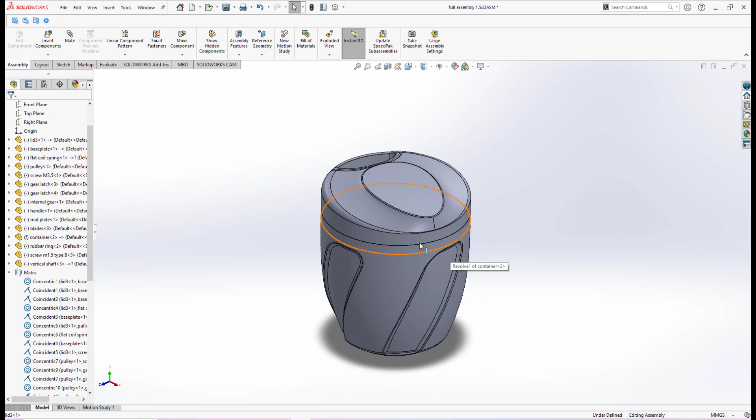But the first thing I need to check, in order for us to do full assembly, is to make sure that all your parts are in a correct position. So one thing that I noticed is that if I go to the top view, the direction of my lid and also the handle is kind of slanting to a certain angle.

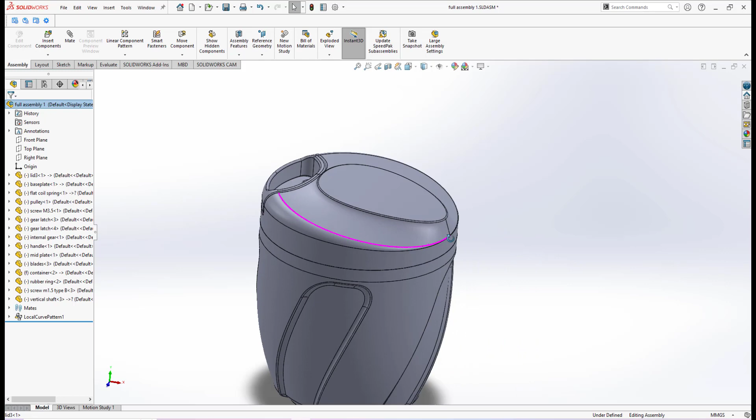So let me go back to isometric mode. I need to make sure that this lid and also the handle, since the handle will follow the lid because I have already set the mate setting, the only thing that I need to change is the lid itself must be perfectly horizontal. So if I go to top view again, the orientation of the lid is not in a horizontal orientation.

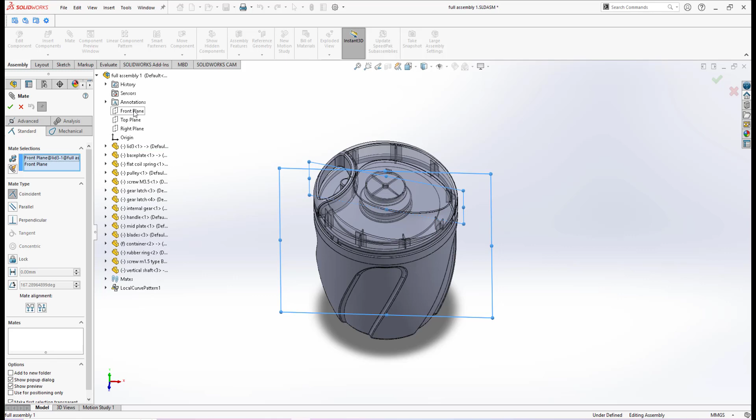So in order to do that, I need to add another mate setting for the lid. If I click here under assembly, we have mate. I must make sure that for the mate setting, I select the lid front plane, which will mate with the main front plane of this assembly file. Then if you look here, our lid and also the handle will follow, and if I go to top view, it is perfectly horizontal.

Okay, now I save my assembly file.

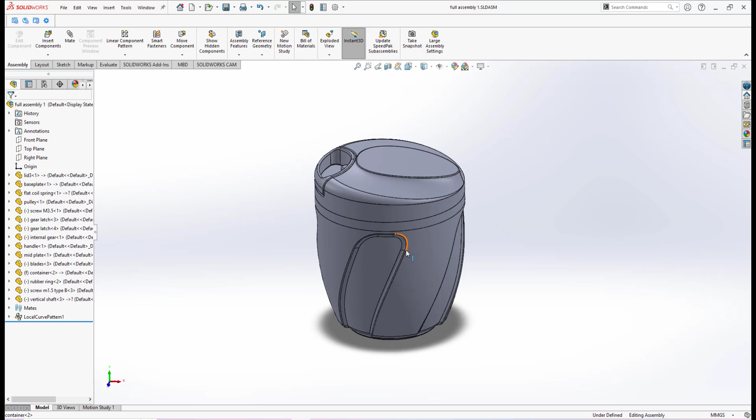Another thing to do in assembly, before we create the assembly drawing, is we must make sure of the order of our assembly. If you look here, I already did the assembly, but the order of my components is not in proper order. Before we do the assembly drawing, we must make sure that all the components involved in this mini blender are in order. What I mean is, let's say when you dismantle this mini blender, you disassemble it, and you want to assemble it again, the order of your parts must be based on the proper order.

So it means that what will be our base? For example, if you want to assemble back this mini blender, our main component or base component should be... sorry, my mistake, our main component will be the container. So the container will be the base of this full assembly.

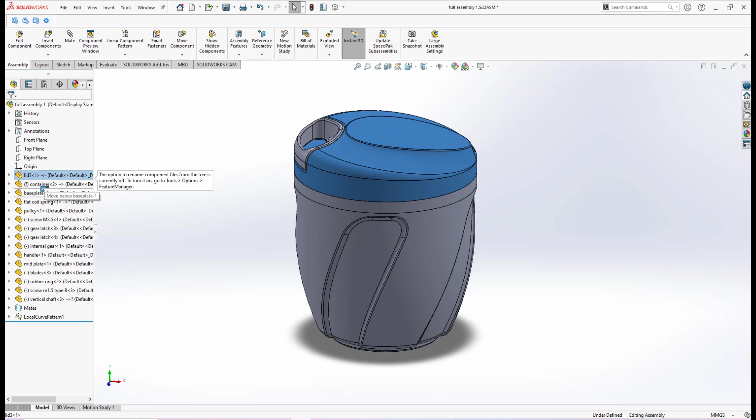So it means that this container, where is my container? Container is here. I can drag this container up until it becomes the first in my list. Let's go back, sometimes you cannot drag to the top like this. The lid here, I make it lower, so container will be number one, the base component.

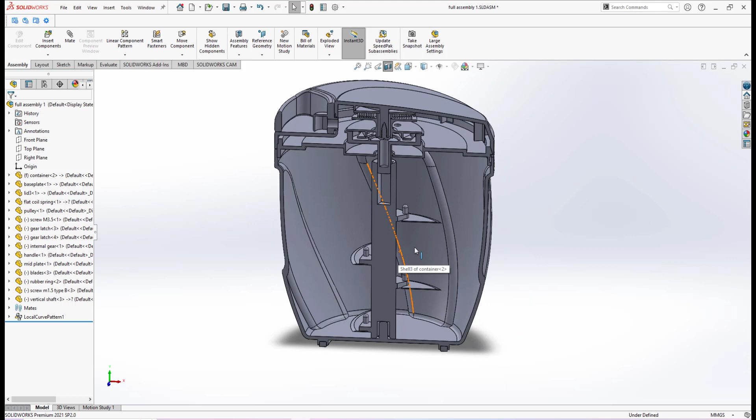When we want to assemble back this mini blender, after we have the container as the base, what's next? Let me go to a section of this front view to better explain the orientation of this assembly. When we want to assemble this mini blender, the first thing will be the base.

So the second component will be the shaft. Then we will mount the shaft. Then we will mount the blades and the screw to the shaft. So the vertical shaft, we should drag it so it becomes the second component right after the container.

Then after the shaft, we will mount the blades and the screw to the shaft. So the third component will be the blade. I select the blade and drag it up until it becomes the third component. Then we have the screw, the small screw here, and the screw M1.5 here will be number 4 right after the blades.

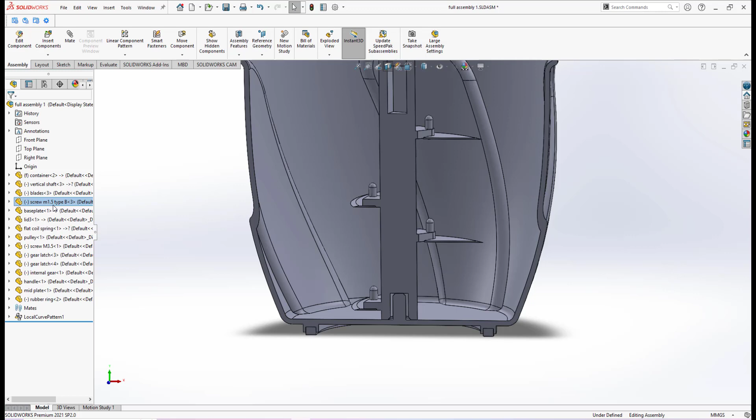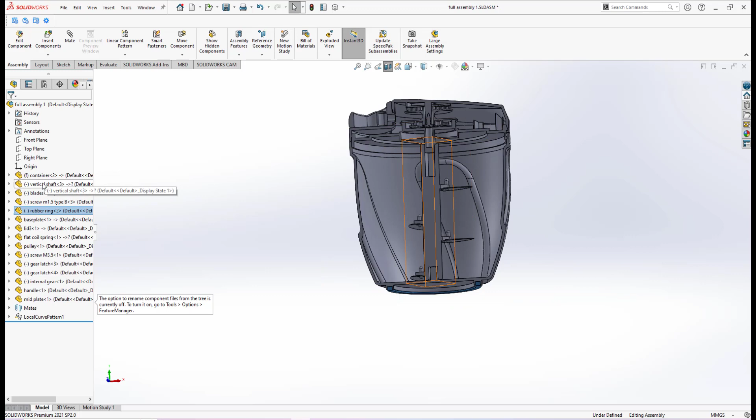Okay, then this shaft will be mounted on this main component, the container. Then we will mount the rubber ring, so the rubber ring should be right after the screw. If you look here, the order is proper: first is the container as our base, then the vertical shaft, the blades, the screw, and the rubber ring at the bottom. This will be the sub-assembly of our bottom components.

Then we go to the sub-assembly of the top component. After we have assembled the bottom parts, then we will assemble the top parts, the sub-assembly of the top parts. So for the sub-assembly of the top part, the base will be the lid.

So the lid here should be dragged right to the bottom of the rubber ring. As if you remember my previous video where I do the assembly of this component, after the lid, then I will mount the base plate. So the base plate is right after the lid. Then after the base plate, we have the coil spring.

So the coil spring, if you look here, is in order right after the base plate. Then after the coil spring, we have the pulley. Then after the pulley, we have the screw. Now I have the screw, so it means it's in order.

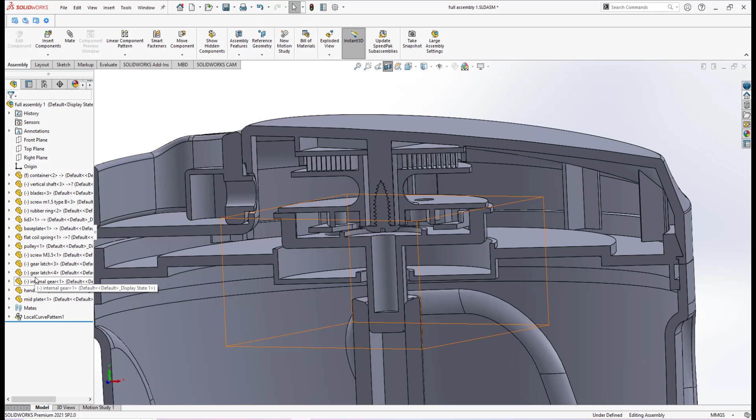Then I have gear latch, so I mount the gear latch, because we have two of them, gear latch 3 and 4. And then I will mount the internal gear. So it is in order.

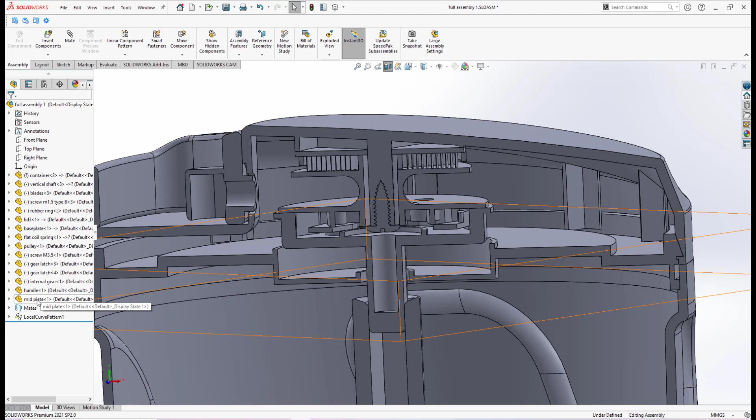Then after the internal gear, we have the handle. We assemble the handle, and then the middle plate is the last of our sub-assembly of the top parts. Then we will mount all this assembly on the top parts to this sub-assembly of the bottom part, so it means now my components are in order.

So it's better to do it like this. Make sure that the order of your components must be ordered. That's why when you do assembly drawing, let me save this. Okay, I save it again, and now I will do the assembly drawing.

So to create the assembly drawing, I will click at new document here. We have an arrow here, so I will go for make drawing from part assembly.

SolidWorks will ask for the standard sheet size. What is our drawing size? A1, A2, they have all of them here in the library. But in this case, I already have my template for the drawing sheet done in A3 size. I will browse my template that I've done. Hold on, so this is my template. I click OK. This drawing sheet is in A3 size.

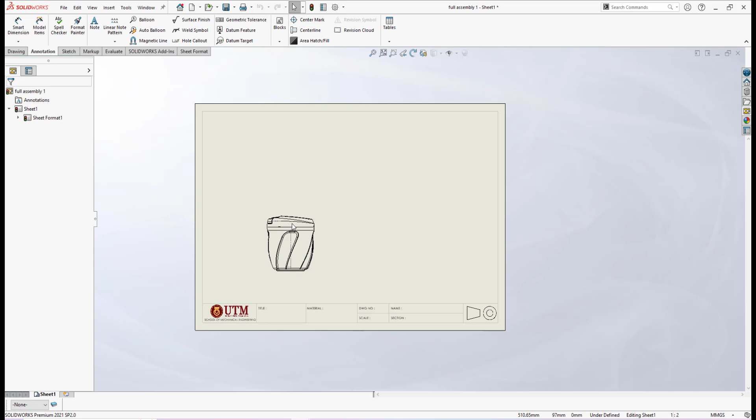Not necessarily for all products must you drag top, front, and side view, because for a product like a mini blender, the best views to drag are top view and front view. Also automatically, if you look, SolidWorks will detect the top view. And if I bring it to the corner, we go for isometric view. Okay, let me cancel it, just press escape and we cancel it. This isometric view I can drag it somewhere at the corner here.

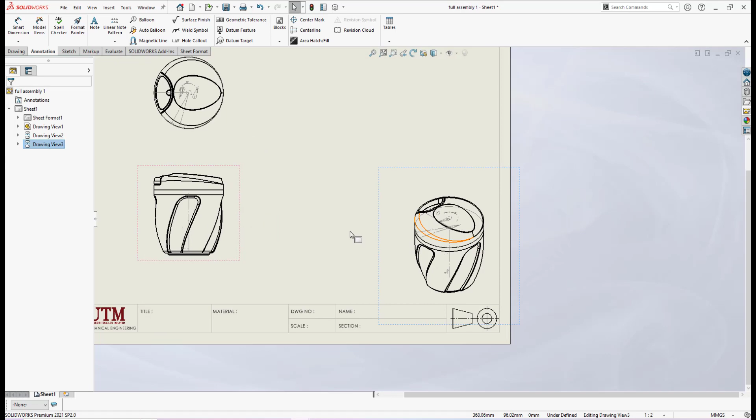One thing to do here, if you look at all the views of our drawing, they show a sketch, so we can go under view, under hide/show, and turn off the sketch so we have a clean view. Another thing to do, if you look, this is a top view, this is a front view.

If you look at this front view, I click at the viewport. If you look at the menu setting on the left here, under the scale, if I go for custom scale, the default is 1:2. Under custom scale, let's go for full scale 1:1. But if I click at 1:1, if you look on the screen, it's kind of too big, so I think it will not fit into this A3 size paper.

So I will go back to 1:2. It is reduced. I think 1:2 is good enough to fit into this A3 paper size.

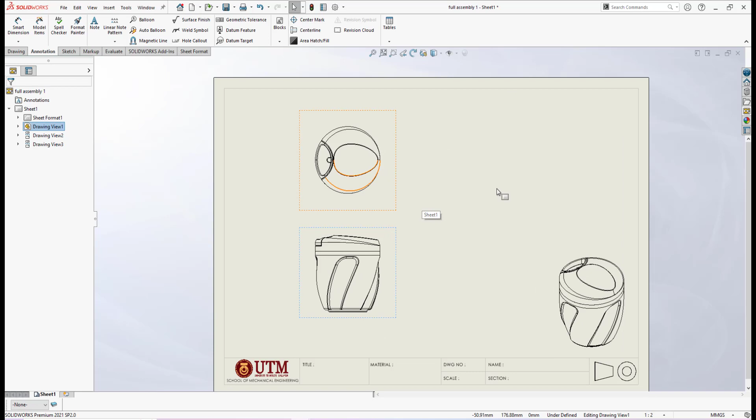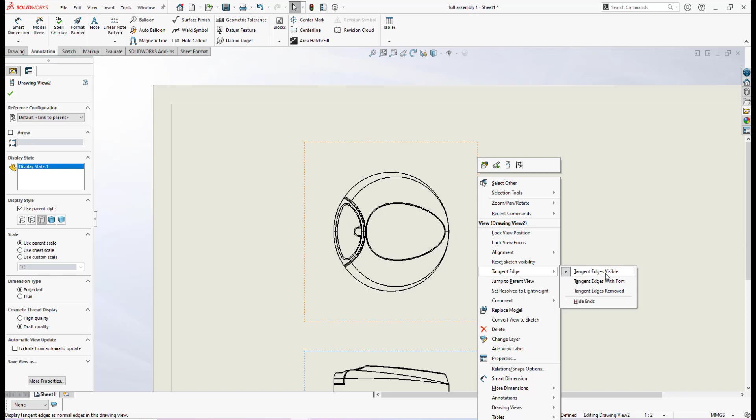If I zoom in on the top view, it shows all the edges. For proper engineering drawing, these tangential edges should not be shown. To remove that, I go to this viewport, click on it, right click, and go under tangent edge. By default tangent edge is visible, so I set tangent edge to remove, and now we have a nice proper outline for our top view.

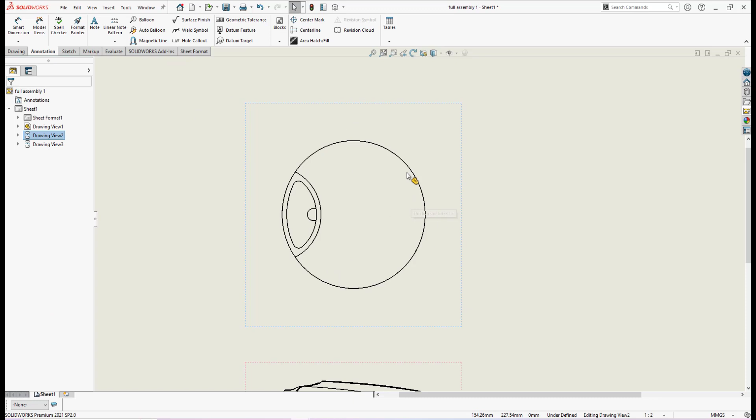If you see in this top view, we have a full circle of our product, so better we create a center line. Let me click OK first. In Solidworks, under the annotation tab, we have a center mark. I create a center mark and simply touch the circle line, and automatically Solidworks will make a center line.

This product is a mini blender, so most of our components like the shaft, blade screw, internal gear, pulley, blade plate and so on are inside the component, so they're not showing in this front view. For this assembly drawing, we should do a section.

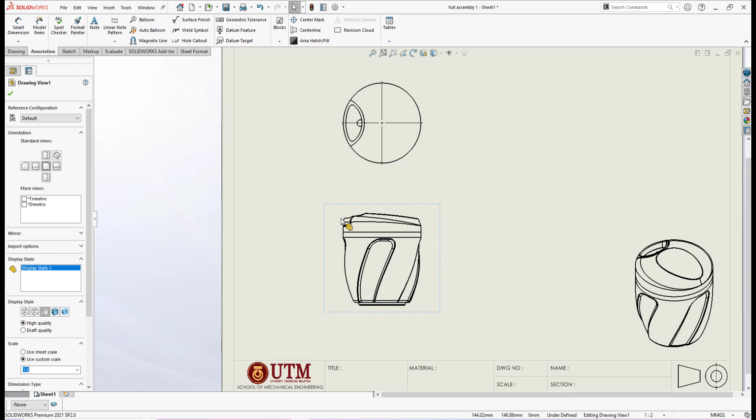Normally in assembly drawing we have a full section. So what I will do is replace this front view with a section view. I select this front view and delete it, click yes.

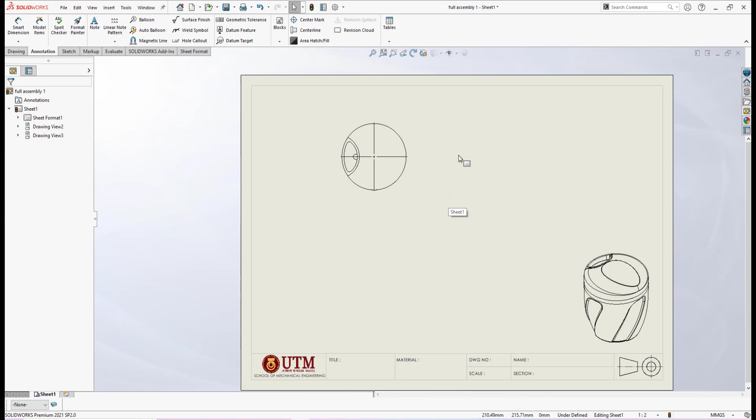This top view will be my cutting plane, and I will do a full section, with the section view appearing at the bottom from this cutting plane at the top view. In Solidworks, under the drawing tab, we have section view. I click at section view, and if you look at the menu on the left, we have vertical, horizontal, auxiliary and aligned options.

In my case I will do the horizontal, I click the second one, then bring it to the center of this and click OK. Then this menu will appear, where we can select any component involved with our cutting line.

For example, standard components like a screw, spring, ball bearings or a plain shaft need not be hashed when we do a section. So I can select certain components which should not be included in the section line. In this case, I simply click OK because I will do that later.

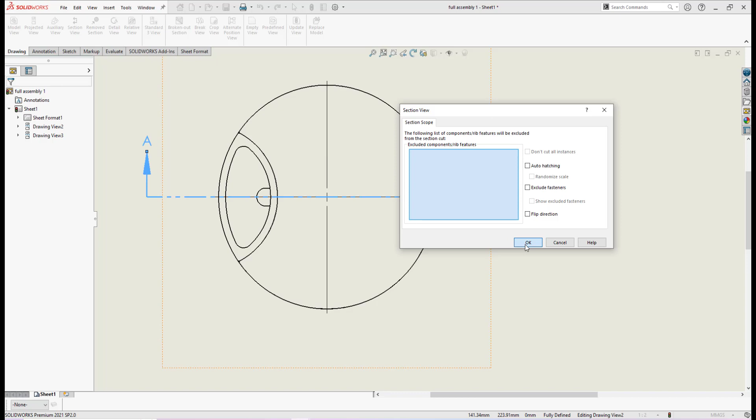I'll show you. Now we have a section view, I drag it to the front view. This is our front view, and it also says Section AA, with our cutting plane labeled AA. If I click OK...

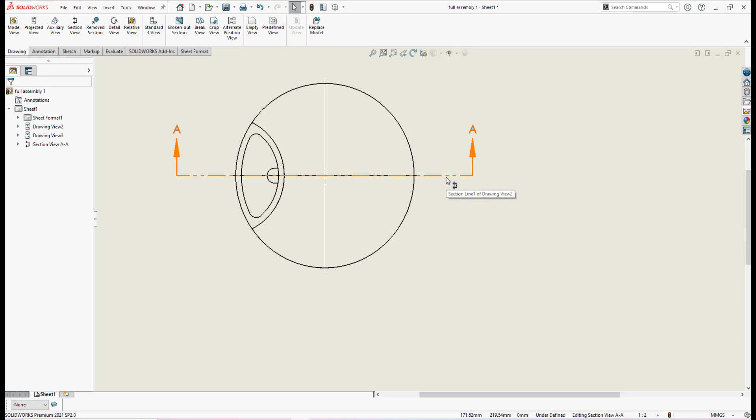But if you look, this cutting plane style isn't the standard we want, because since we use ISO, this is currently American standard. To change this, I go under Options, under System Options, then the Document Properties tab, I go to Views, and under Section here we see by default Solidworks uses ANSI, American National Standard Institution. For our course we will use ISO.

So I will select ISO, then use the first option, meaning the standard with connector, so we have a center line and arrowhead. Then I click OK. If you look on the screen, it's changed into the standard ISO style for the cutting line of our section.

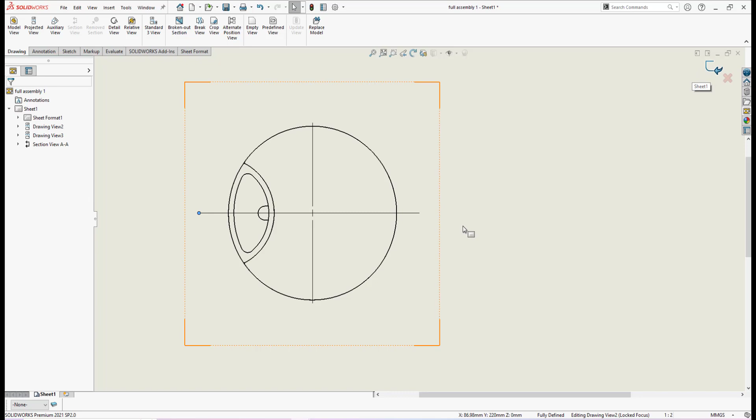Another thing to check: the section line is kind of too long. I can adjust the length by clicking on it and going to edit sketch. I select this line and edit it to make it shorter, and also select this other line and make it a little bit shorter. Then I exit the sketch, and now my cutting line is shorter.

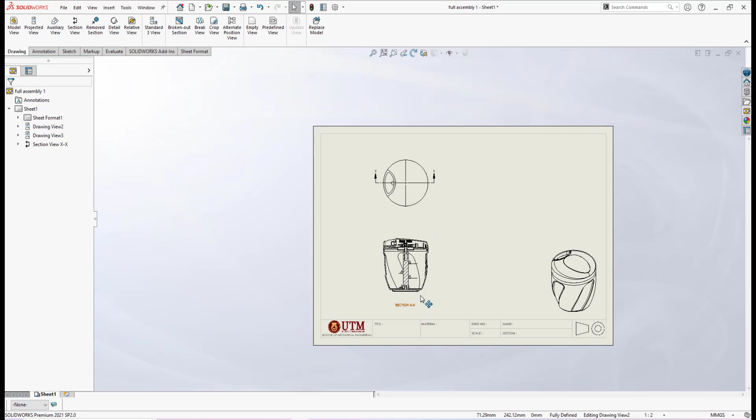The next thing to do: the cutting line labeling here is AA. I can change this labeling to X, making sure we use the capital letter, and now it changed to XX. If you look, the labeling here is Section XX, so let me drag this a little bit lower.

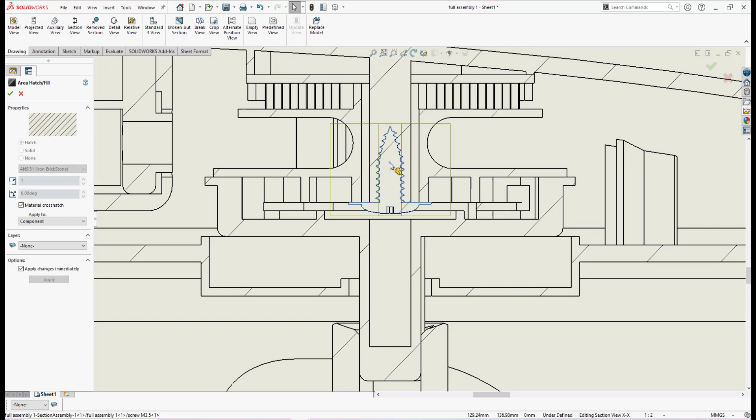If we look in the section view, Solidworks automatically does hatching for all components, including standard components like screws. In standard engineering drawing for assembly drawings, standard fasteners like screws, bearings, and springs, if a cutting plane passes through them, should not be hatched in the section view. So I need to exclude the screw by right-clicking it, going to properties, then under section scope, select the component we need to exclude from the hatch.

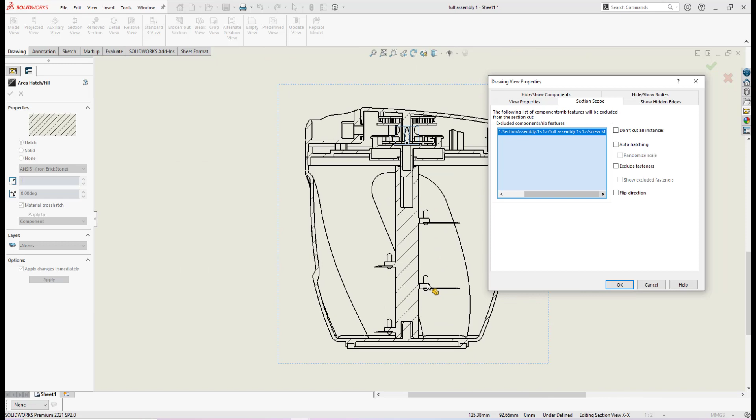I select the screw, so it's listed here. Now I need to check what other standard components are really in the section cut. This shaft, for a standard shaft engineering drawing, also need not be hatched, but for this case, this mini blender shaft is a custom-made shaft, so I let it be hatched in the section view. So the only thing I select is this screw. If I click OK, now the screw will not be hatched.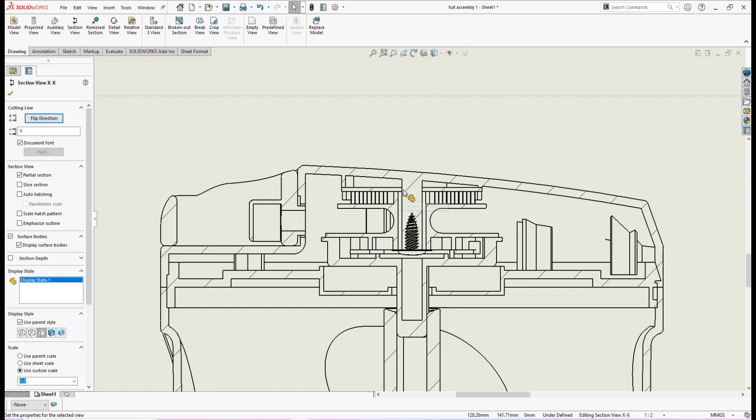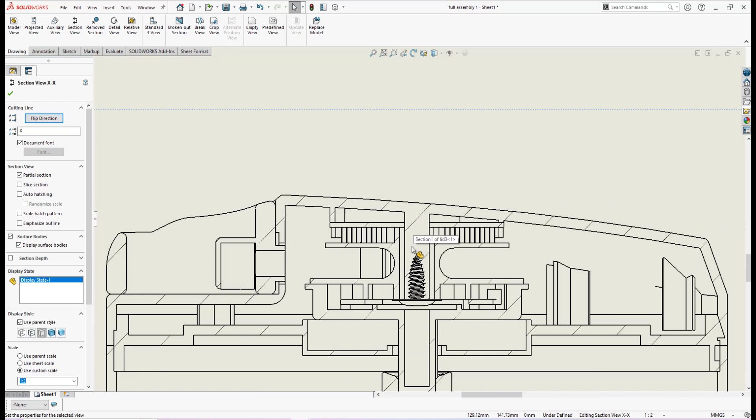Next, since Solidworks does this automatically, it will hatch all the other components. If you look, this is the hatching line for the lid, and this is the hatching line for the handle, the pulley, the internal gear, and so on. In standard engineering drawing, for different components we need to put the hatching line at different angles, and also the distance between the hatching lines is too far, so I need to reduce the scale.

To do that, I select the hatching line of this lid. In this menu, Solidworks uses material crosshatch by default, so I uncheck the material crosshatch and use the most basic pattern, which is parallel lines. Under parallel lines, the first setting is the distance of the hatching line. If I increase it to 3 instead of 1, Solidworks makes the hatching lines narrower, so it becomes more dense. I go for 3, and the angle I go for 45 degrees for this lid.

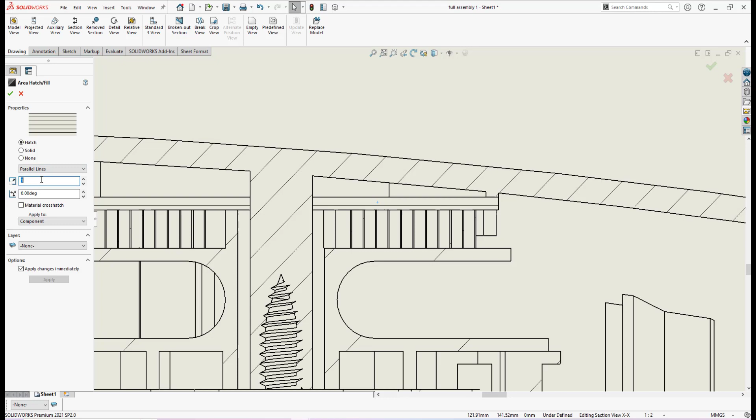Then for the other component next to this lid, for example the base plate, I select the base plate and do the same thing: uncheck material crosshatch and use parallel lines. For this one, the scale I put is 3, meaning more dense, then I go for negative 45 degrees, because standard engineering drawing requires components next to each other to have different hatching line angles.

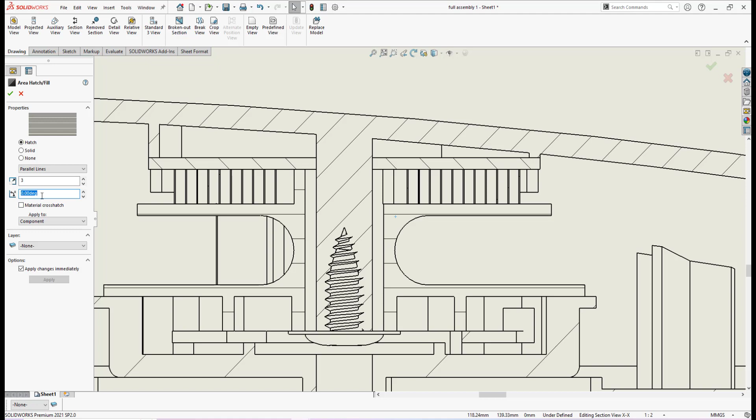For the pulley, next to the base plate, I select it and use the same procedure with parallel lines, scale 3, and angle 45 degrees. So it means we need to make the angle different if the component is next to each other.

I will do the same procedure for all the other components. Let me make a shortcut of this video, pause it, and show you the end result.

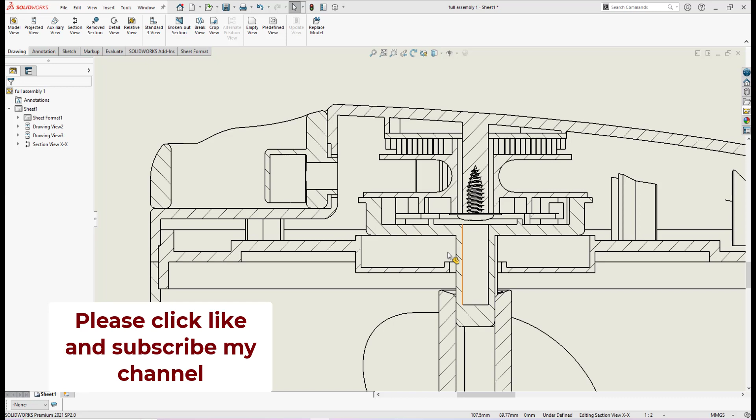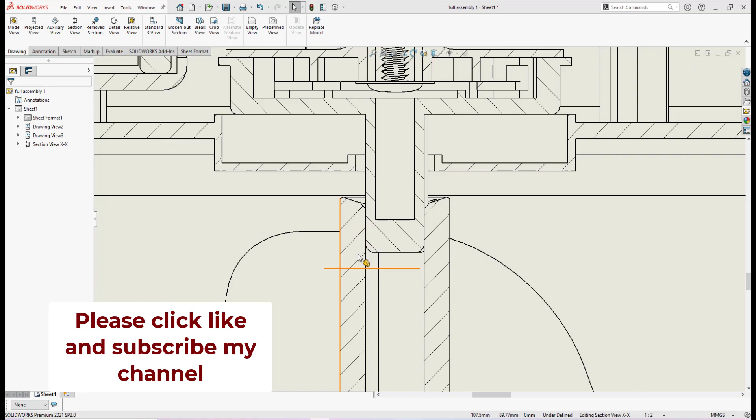As you can see now, I've already made all the changes for the section lines for all the components. If you look at the handle, the direction of the hatching line is at a different angle, and also the internal gear and the middle clip. You must make sure that each component beside another has hatching lines at a different angle, including the shaft. Looking at the rod of the internal gear, the direction of its hatching line is different. Also the thickness of the lid has hatching, and this is the rubber ring.

I think I've already done all the hatching. I've changed the setting of the hatching for all the components, and everything looks right. Let me save my file.

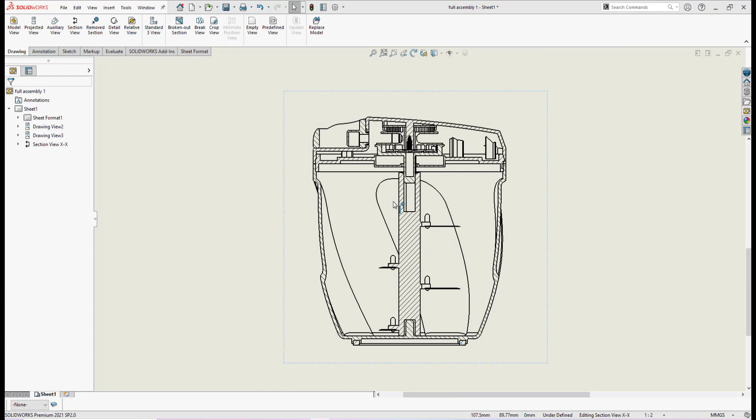After I've done the hatching and section view, the next thing to do is about the balloons and also the bill of material. In order to do that, I go for bill of material first.

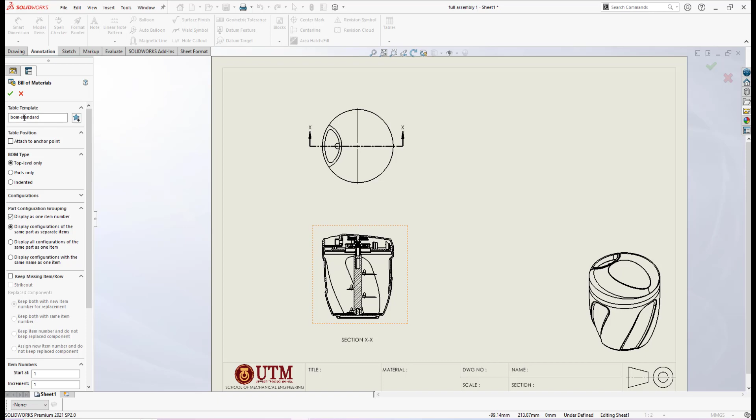To do the bill of material (BOM), under annotation we have tables. If I click the arrow, we have bill of material. I need to select the view portion, so I select this front view, and go for standard BOM. Then I place this BOM at this corner. As you can see, Solidworks automatically arranges the components from item number 1 to item number 14.

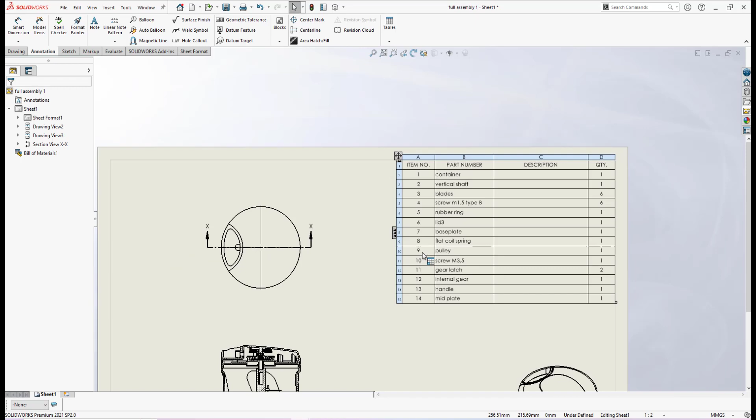If you look at the ordering of the parts of this mini blender, as you can see, the first is container, the base, then we have vertical shaft, blade, screw, rubber ring, lid, base plate, and so on. So the way SolidWorks puts them into the list of this BOM is based on what I've explained earlier in this video about the order we put them into this list. So in this drawing, the ordering of the bill of material list is right.

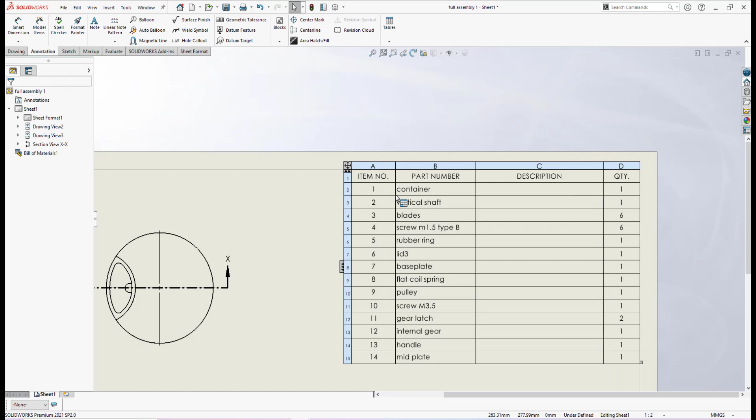So the only thing to do, since in this video I just show you the most basic way, actually there's a much better way to make the title of this part number. So for this case, I just edit it, because in a bill of material we need to put it in proper name and also in capital letters. So I will double click edit.

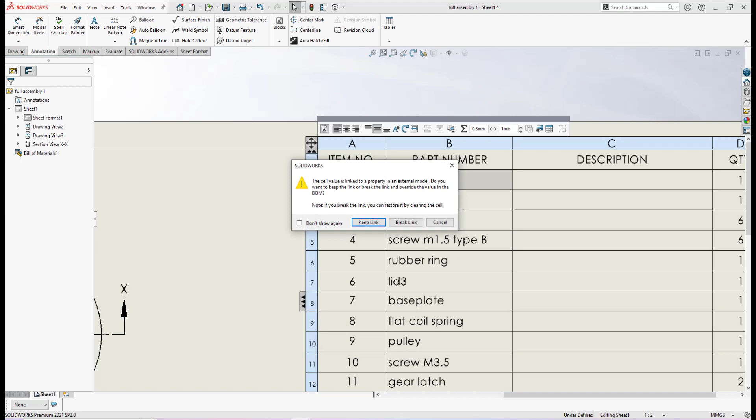When I double click edit, it says, do not click break link. So I will say keep the link, because this has kind of a link with the original part file of the container. So I will double click edit and retype it and make sure that it is in capital letters. So this will be the container.

Then I will go for this one. Make sure to click keep link, and this one I go for vertical shaft. I change it to proper name, also must be in capital letters. I click keep link and I name this blade. Okay, I will pause this video, so later I will show you the end result.

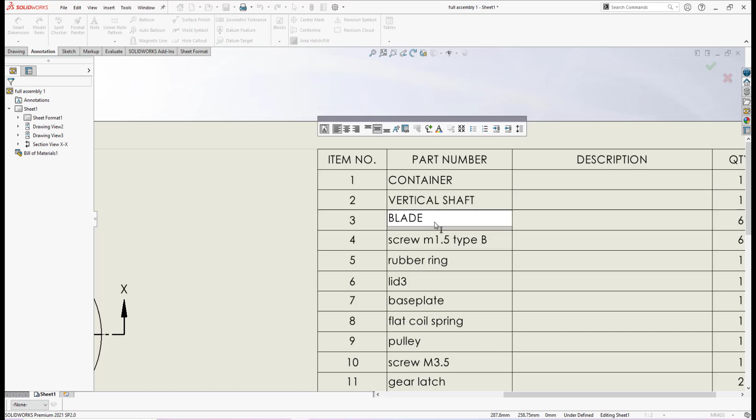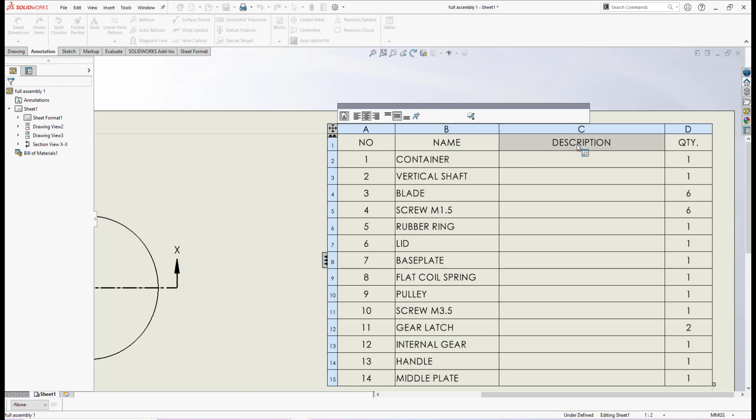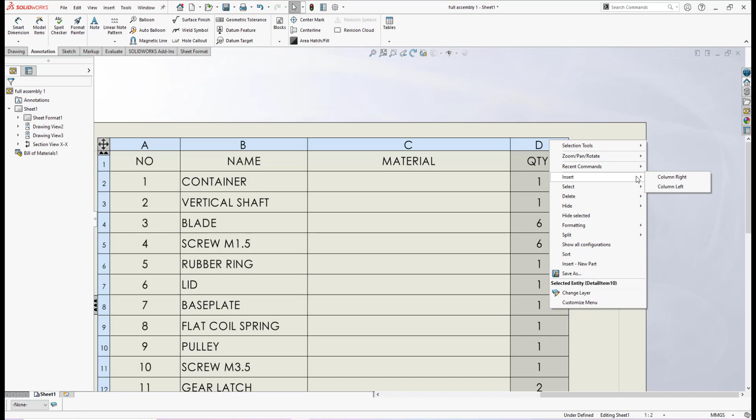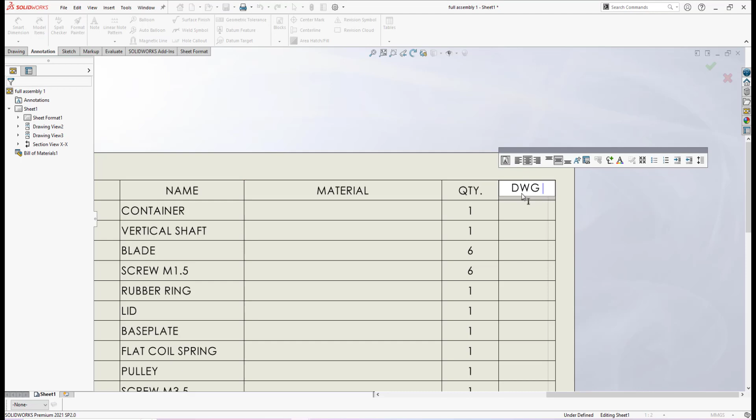Alright, let me drag this BOM a little bit here. I select this column, then I will right click, edit, insert column, right. So I have a column added here. For this column, I will name the column drawing number. Okay, then let me drag a little bit like this. Make sure that it snaps to the border, and I can reduce this column. Okay, now I have the basic of this BOM.

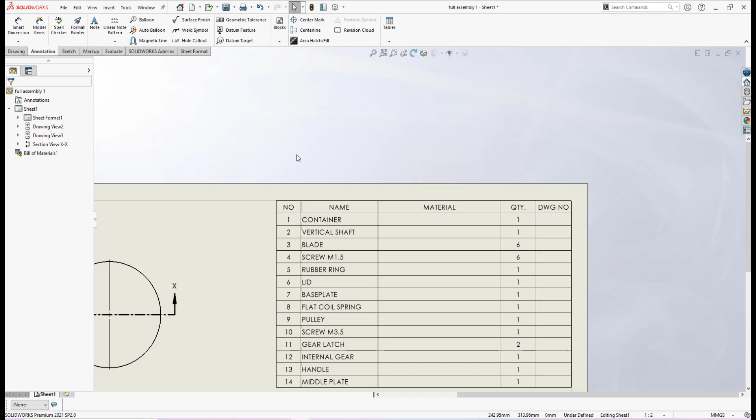Okay, the next thing is under the material name here. Actually, if we do it the more advanced way, the material will be automatically listed here, because when we do the part modeling of each component, we can put the material of each component. But the purpose of this video is just to explain how we create a BOM in a basic way. So the material here I will put manually later by adding text.

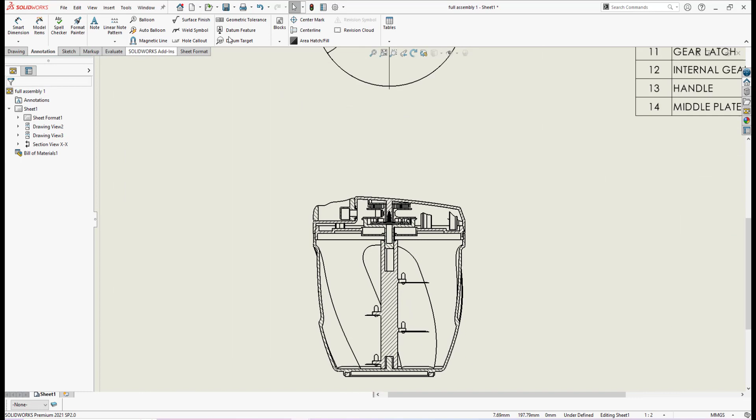Alright, one thing to mention is that before I add the balloons, if we look at the top view, we have the center marks. I need to add a center line here. So under annotation we have center line, so I just simply select these two lines of this shaft. Then SolidWorks will put a center line there. Then I can adjust this center line.

I will drag this thing, oops, not the view, hold on, and carefully select the line here. I make the line a little bit longer here, and also this line I drag it like this. So we have a center line for this front view.

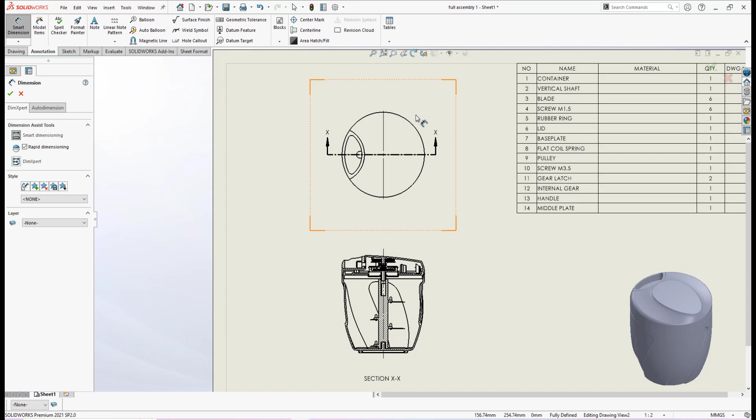Alright, the next thing is that since this is an assembly drawing, people also need to know the overall size of this mini blender. So I can do basic dimensions, for example I will give the radius here, so people will know the diameter of this mini blender, and also I will give the dimension of the total height of this mini blender.

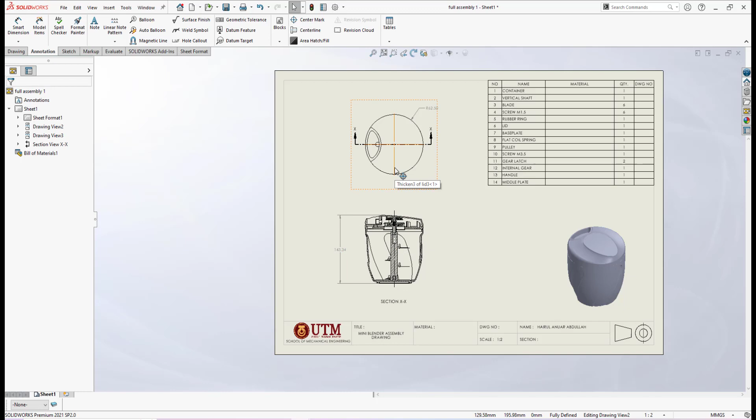Since in an assembly drawing we will not put detailed dimensioning, we can put the overall size of our product, so it's okay to put the diameter and the total height, so that people will know the overall size of this mini blender. Alright, let me save my file again, hold on. Okay, the next thing to do, I will add balloons.

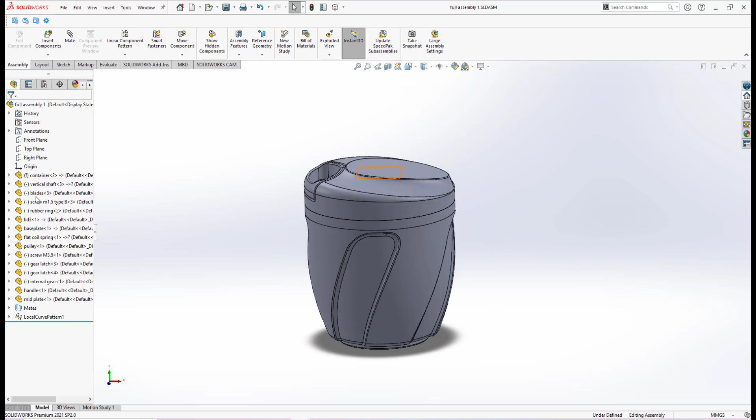So if you look in this front view, remember if I add balloon under annotation, if I click balloon, I will show you how I add the balloons manually. If you remember, early in this video I already showed you, let me cancel the balloons again. If I show you the assembly of this mini blender, I already arranged the list of the components, the parts, in order. The base will be the container and so on.

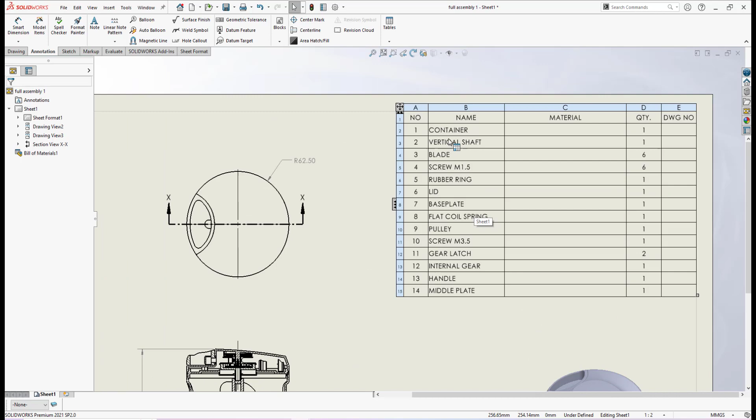So automatically in the assembly drawing of this mini blender, Solidworks will know the order; the numbering of the balloons will be based on the ordering here, the order that we already set in the assembly. Okay, now I will add balloons. I will point to the first one, which should be the container. So you go for one.

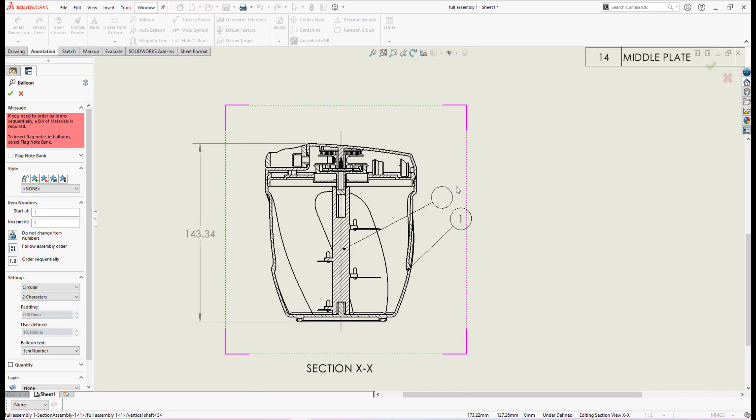After the container, here will be the vertical shaft, so I will point to the vertical shaft. When I do the balloons and bring it over, they have a yellow line, which means they maintain the line position of balloons 1 and 2 for neatness of the drawing. Then we have the blade, component number 3, so I will zoom into the blade. I click like this, and make sure it's in line, we have a yellow line there. In terms of neatness, I should put this pointer like this.

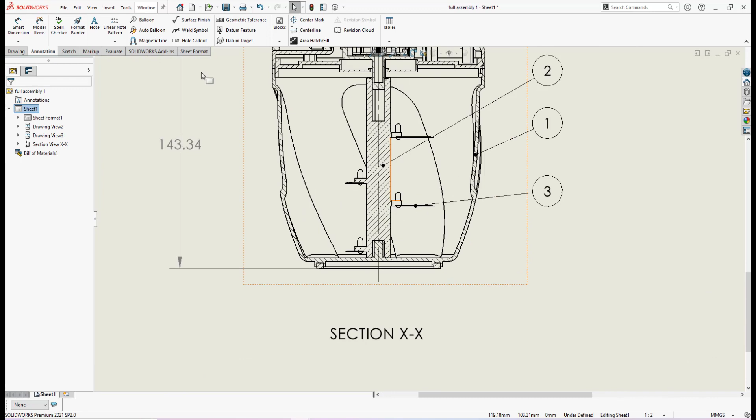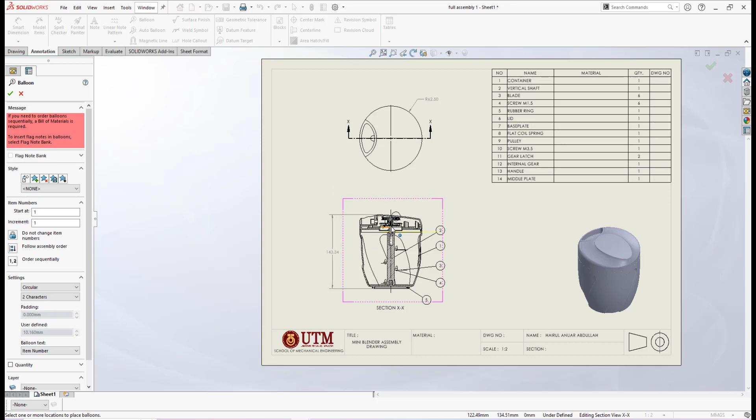Component number 4 should be the screw. I zoom in at the screw and add the balloon pointing to the screw. Number 5 will be the rubber ring, so I zoom to the rubber ring and make it like this. Number 6 will be the sub-assembly of the upper parts, the lid. So I zoom at the lid and put it here, 6.

After the lid, we have the base plate, which should be number 7. To maintain it inline, you can see the yellow line here. After that, we have a coil spring. Sometimes when you're pointing to your component, it has an arrowhead instead of a dot. Make sure you zoom in closer so we have a dot here. So this will be number 8.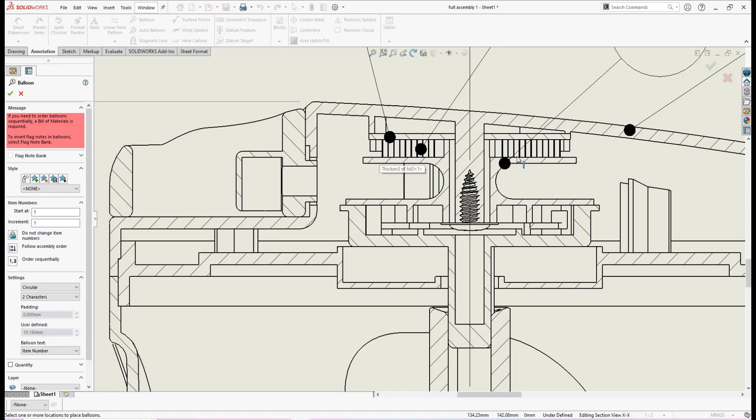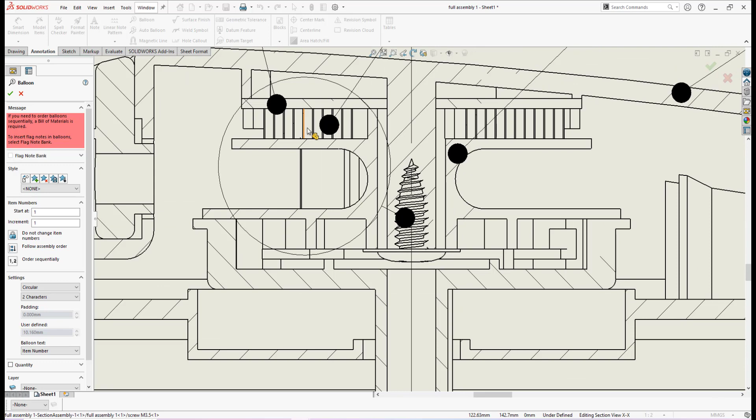Number 9 should be the pulley. So I zoom in at the pulley, and this will be the pulley. Make sure it's in line. Number 10 will be the screw, M3.5, so I zoom in at the screw. Make sure it's pointing with a dot instead of an arrowhead. So I put it here for the screw. Make sure that you have a track of the yellow line. Okay, that will be the screw.

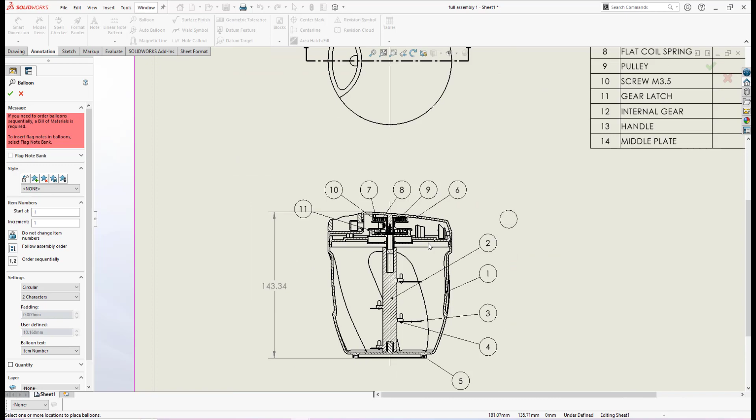The next, number 11, will be the gear latch. Let me zoom closer. Make sure it reads gear latch. Okay, this is gear latch, so I put it here, component number 11. Then 12 will be the internal gear. So I zoom into the internal gear. Make sure to maintain it in line; we have a yellow line here, which means the balloons are in line. This will be 12.

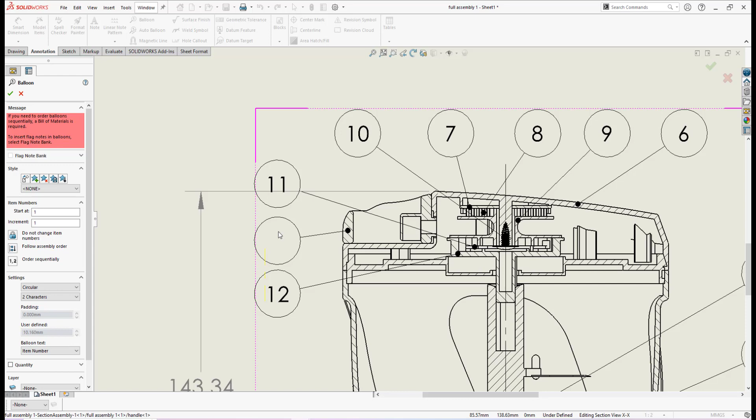And we have 13 for the handle. I will go here for 13. And 14 is the middle plate, so I zoom in like this. This will be the middle plate. Okay, let me do some adjustment. I think I've listed all the components until 14. In terms of neatness of the drawing, let me do the labeling. Alright, I think it's quite okay for the balloons.

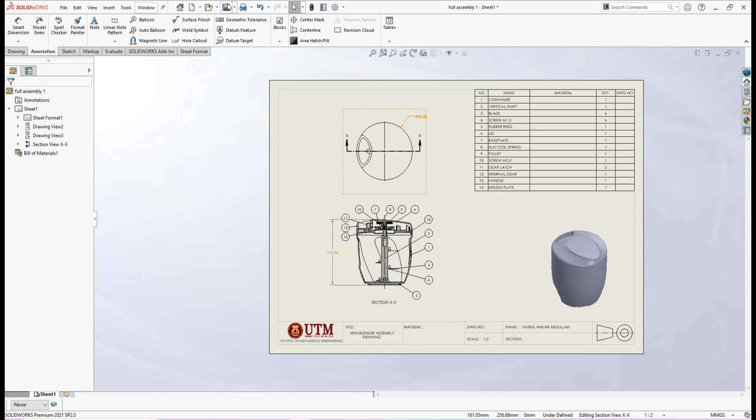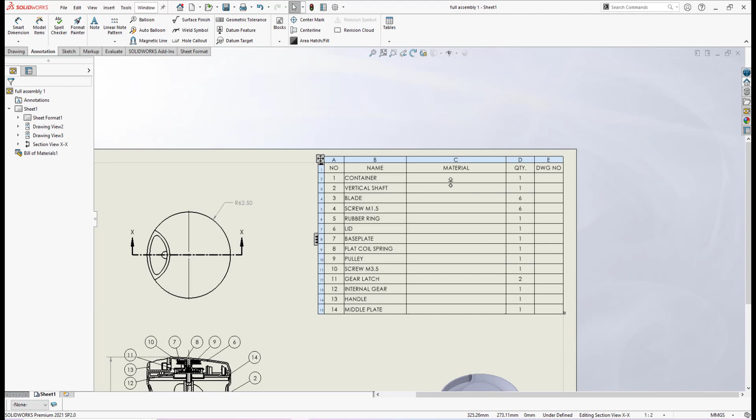Let me save my drawing again. Under the material here, as I mentioned just now, if you do it the more proper way, the material will be automatically listed, but I will explain using the basic way. So I will add the material manually by adding text. If I double click at the table here, I type the material manually.

The container is plastic. Let me copy this word. I double click at this one and paste it, and the blade is not plastic, steel. The rubber ring is rubber. The lid is plastic.

Okay, let me pause this video. Then later I will show you the end result. Okay, as you can see, this is the end result. I already put all the proper material to the component. For example, container, vertical shaft is plastic, and the lid is plastic.

Base plate is plastic. The pulley, the gear latch, internal gear, and also the handle is plastic, and also the middle plate. Certain components like this blade, actually this blade is a non-standard blade, so it should be there. I put the material steel, but the screw, and also if you look, the flat coil spring is a standard component. It means that we will not manufacture this part, we just order it, since they are standard components. So we should not put material here under this BOM.

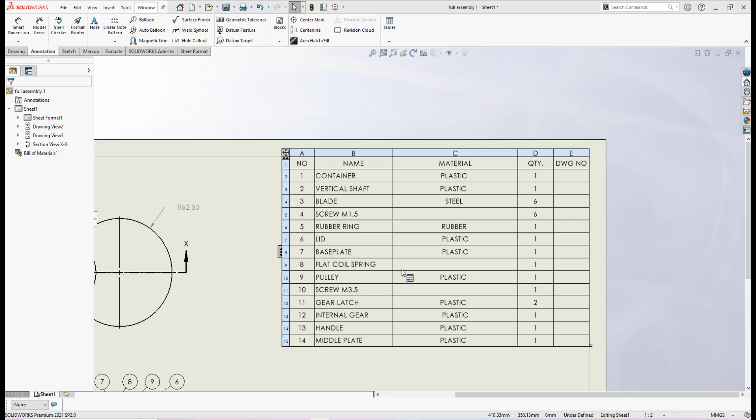For example, the screw M1.5, the flat coil spring, and the screw M3.5, since they are all standard components, we should not put the material and also the drawing number here. Alright, I think this is the basic list I put here. Under the drawing number here, actually I just put it manually like this.

For example, the container is the base one, so I put it as 1. Vertical shaft is drawing number 2. And if you look at the blade, if the blade is not a standard component, it should be drawing number 3. So every part or component that has a drawing number means you have to do a detailed drawing for this part. Screw is a standard component, so I will not put a drawing number. The rubber ring, if this rubber ring is not a standard rubber ring, it will have a drawing. So this will be drawing number 4.

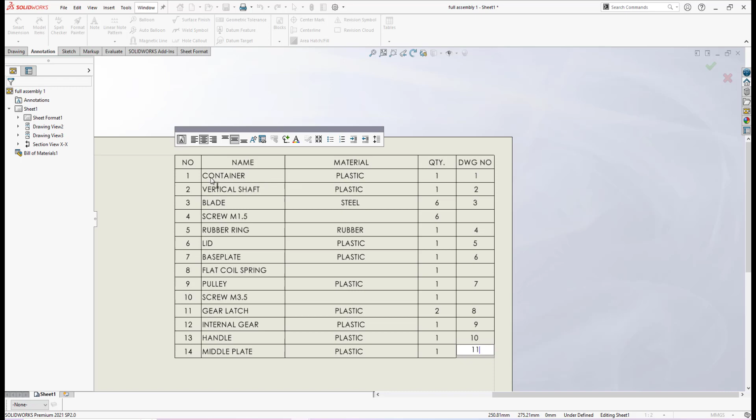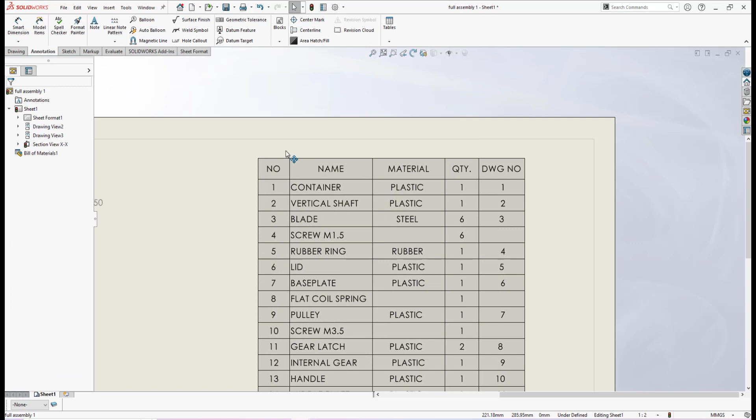Okay, let me do some adjustment here. Let me move around. Snap again at this borderline and reduce the width of this column, and also this material column needs to be reduced, so we will have optimum space. And quantity like this, and drawing number also I reduce the column. And if you look here, I will make it left and center again to make sure that it's in line. But I think it's okay to me. I can edit manually, but for the purpose of this video I need to keep it short, so I can edit it later. Okay, let me drag this title block again. Make sure that it snaps to the border.

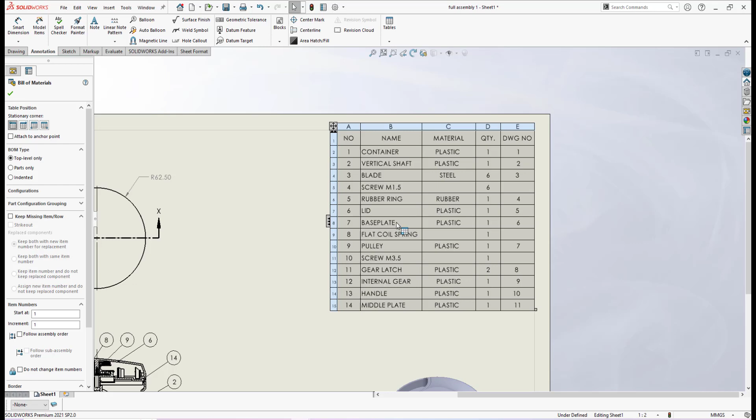Alright, now I have my BOM. Actually, I can save the BOM if I click at this corner of the BOM. If I right click at it, I can save as. I name it as my BOM. Let me replace the old one. So this BOM can be used for another setting of either your assembly drawing or exploded drawing. You don't have to do the setting of this BOM again and again. You can just restore the BOM that you have saved.

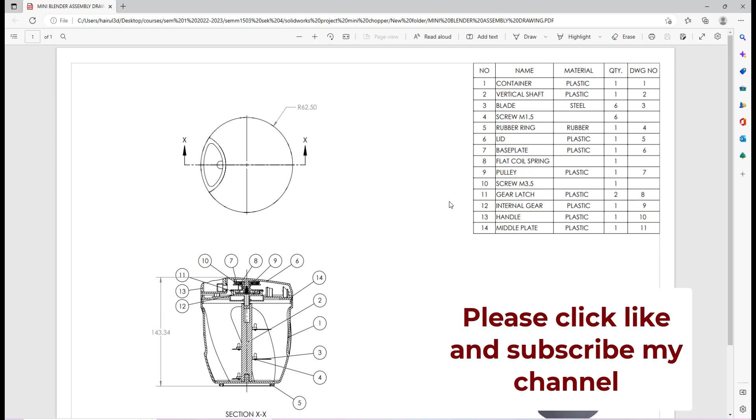Okay, the last thing to mention here, after you have done the assembly drawing, you can save as a typical SolidWorks drawing file. You can also export your assembly drawing into PDF by File, Save As, and go for PDF, and you can type the name like assembly drawing, but the format is PDF. Then I save it. After I've saved the file, I will browse the file. As you can see, this is the PDF format of our assembly drawing.

Okay, I hope this video will help you on your project of doing your assembly drawing. Inshallah, in the next video, I will show how I do the exploded drawing for my mini blender.